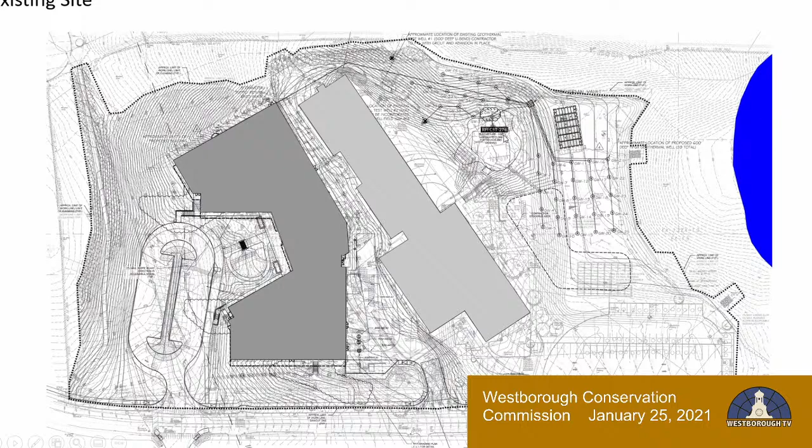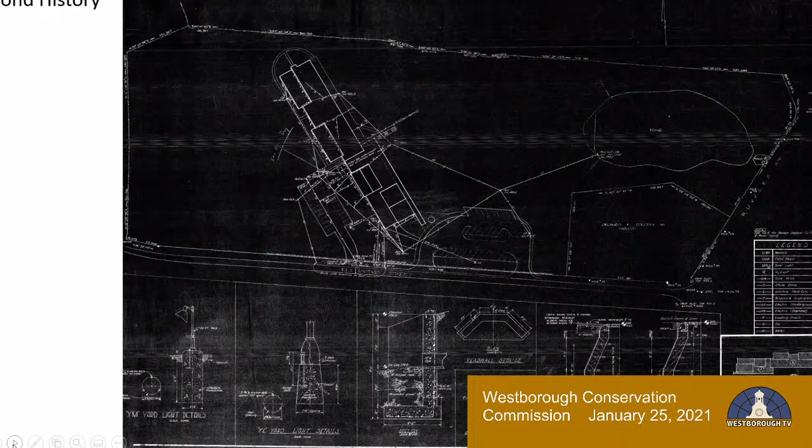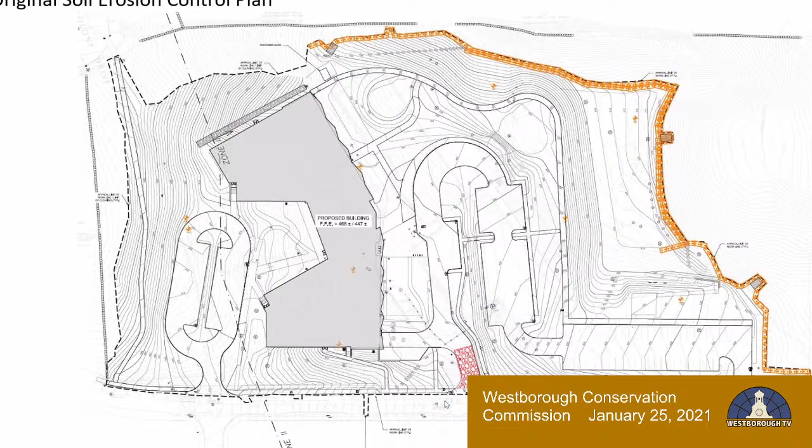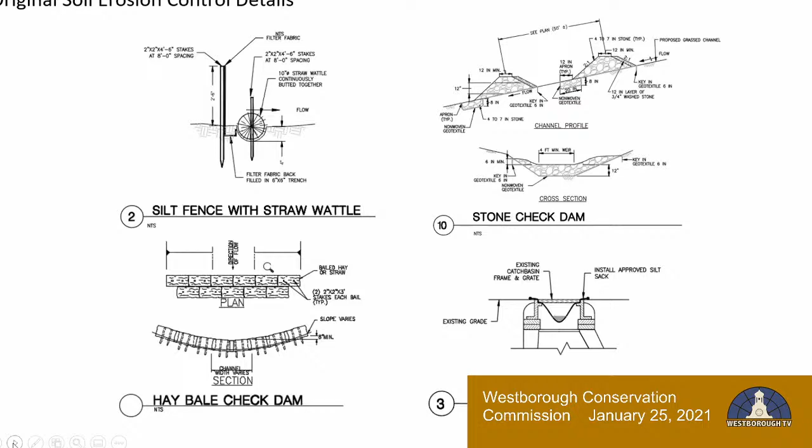And then if you go to the next sheet, Caitlin, it's trickier to see on the site plan, but some of the other erosion measures that were part, as you can see, the silt fence and the wattles, the check dams. We had both stone check dams and hay bale check dams in place, and all the catch basins have silt sacks on them to ensure that silt does not enter the drainage system itself.

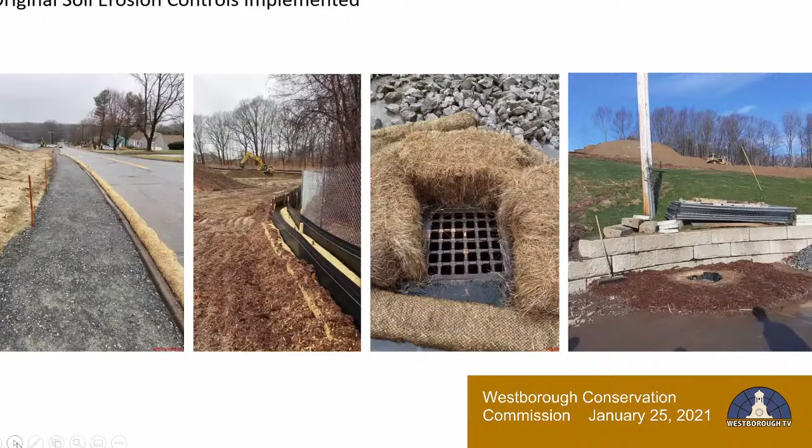Unfortunately, this has not been a typical site. So maybe Caitlin can go through the original issue of siltation that we ran into and some of the history.

Yep. So the first siltation issue we experienced happened around May of 2020 when we were excavating the uphill site, which is to the west, the footprint of the new Annie E. Fales. What was happening was any rain event we had, water was washing down the slope.

This is the high point of the slope, the low point of the slope. Sorry if I didn't previously state that. So any water running down the site, you can see in the image on the left-hand corner of your screen, was picking up this very fine glacial till silt and overwhelming the drainage controls that we had in place. So all of that very fine silt was getting into the existing drainage system, which is highlighted in red on the screen, and funneling through the drains to the head wall at the western portion of the pond.

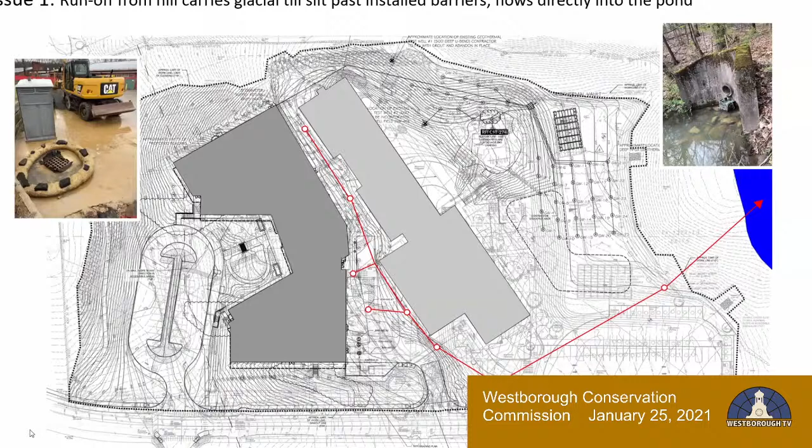Our initial resolutions were to enhance a lot of the controls that were on site, extra straw wattles, some check dams to slow down the water as it was running down the slope to give it more time to let that extremely fine silt filter out of the water before reaching any of the manholes.

We tried diverting the water again to slow it down and direct it away from the manholes. It was still overwhelming the system. The silt was just extremely fine and was finding its way into the drainage system.

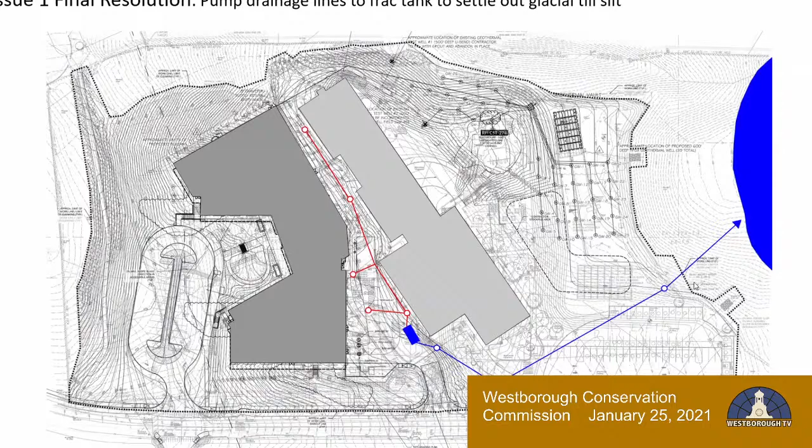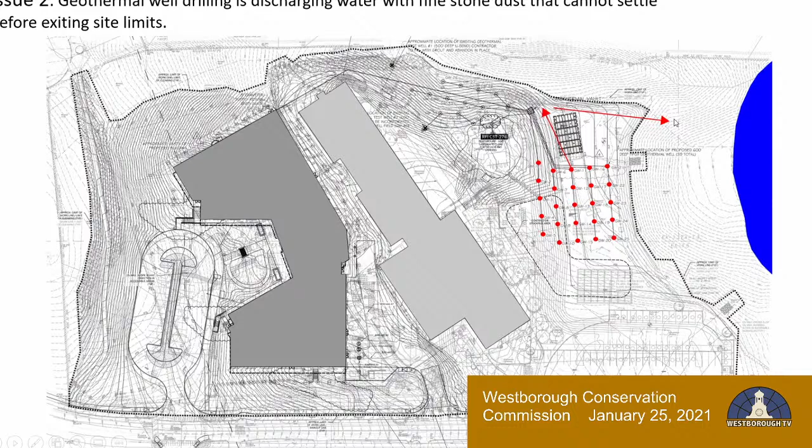The siltation issue number 2 that we ran into occurred December of 2020, while drilling for the geothermal wells, which are highlighted with these red dots that I'm circling. The water contained a very fine stone dust. So when the water from drilling the geothermal wells was pumped onto the site, it was too fine to filter out and was leaving the site in any of the drainage water.

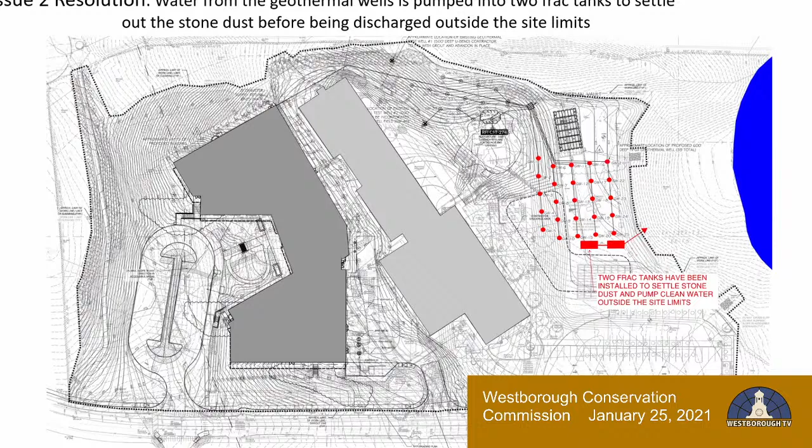So we again installed frac tanks, 2 frac tanks, to deal with this super fine stone dust we encountered while drilling the geothermal wells. Same principle as before: the water with stone dust is pumped into a compartment treated with a flocculant. The stone dust settles and the new clean water is then pumped off-site, directly outside of the site limits so as not to pick up any additional sedimentation. It's purely clean water that then can flow into the pond to the east.

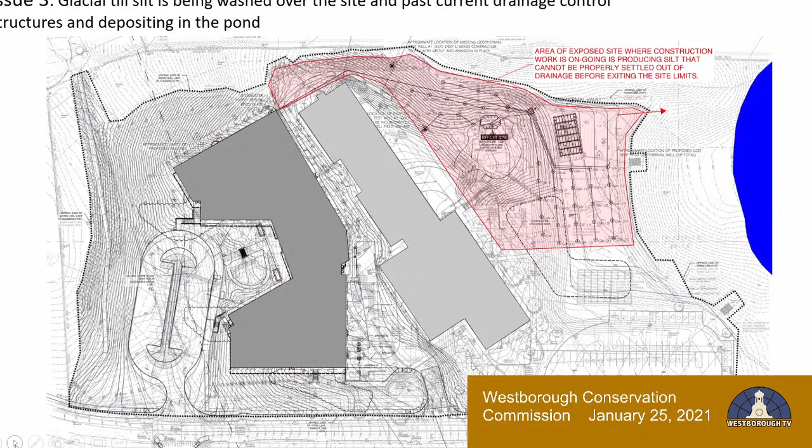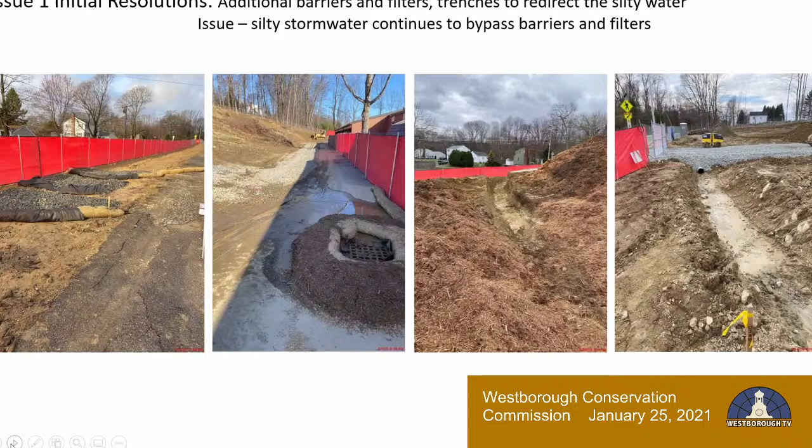Yeah, and there's no question, and Andy, we didn't get a chance to talk about it, but the private site up gradient on Eli Whitney is definitely contributing to the siltation. Okay. No question. And it could have been just along the gutter on Eli Whitney Street that did drain that site. I was at the tail end of the rain event, so I couldn't gather. There wasn't a huge flow through that gutter system and the catch basins. But I might have been catching the very end of the discharge of the event at that spot that we were talking about on Ruggles.

And by the time I worked my way up, maybe 20 minutes later to see that site, it had stopped raining, and I didn't see a lot. I saw definite signs of runoff coming from that site and a lot of exposed soil. So I knew, during the peak of the event, that site was contributing to it as well. Well, that's another issue we'll have to take offline. Yeah. But it's something I think that can be addressed as well.

Andy, if I can just make one comment, Fung Nguyen, who's one of our inspectors in the engineering department, and I met with the owners and construction team at 38 Eli Whitney this morning. That's the site immediately adjacent and to the west. And they did have some weak spots in their erosion control system as well. So they're implementing some additional measures, and we're going to be monitoring that site closely as well.

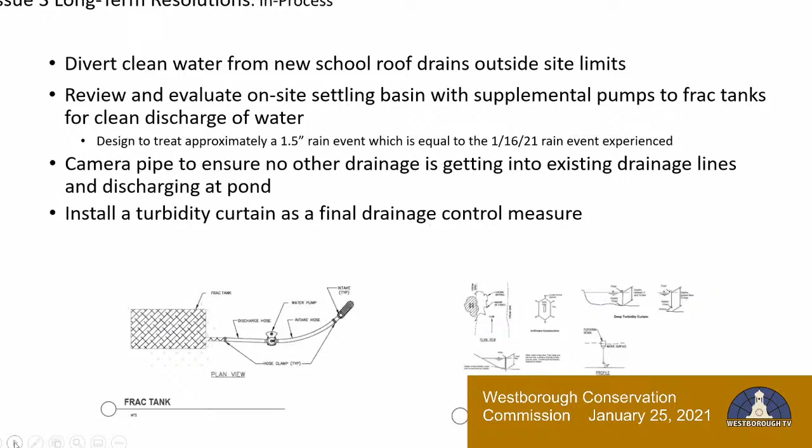Okay, it is true, and all you have to do is walk by and look, because the siltation leaves a trail off the site. So I just wanted to make sure that was said, that we are working with that site too, and it is true that there's an issue there as well. So you all beat me to our last slide, which opens it up for any questions or comments.

Yeah, I have a question relating to how the flow from the drilling operation is being handled. When we were there, our understanding was that the stuff coming out from the drilling was going into a frac tank, and that clean water was being discharged through a flexible pipe off-site downslope. It wasn't discharging at the time, but when we looked at that area off-slope after our site walk, we found a fair amount of evidence that there was silt in that flow coming out of that pipe as well, which was unexpected based on what we had understood. So can somebody explain that for me?

And I think you're absolutely accurate. And that was the discussions, and that's our intent. I believe that was one isolated incident where something had happened with the frac tank or the way that their operation was set up. Since then, we have that more on a regular rotation as far as checking to make sure, and the cleaning and the maintenance of the frac tanks maintained. Your observation is accurate, and everything was put in place, and I believe it was just an isolated incident that happened at that location.

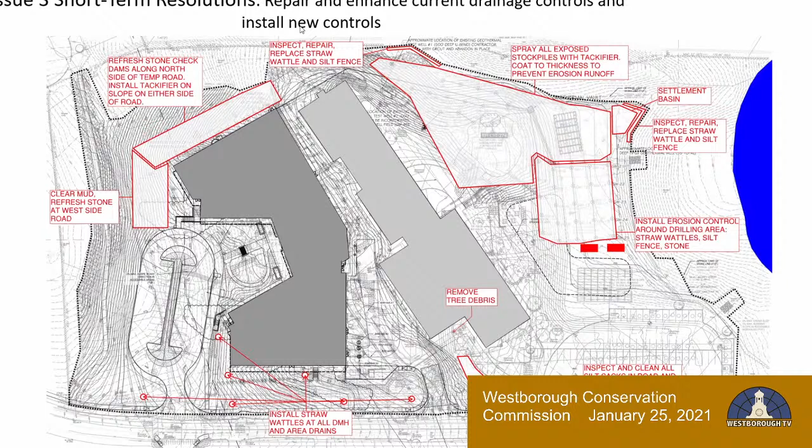Okay. I do have one other thing that's just sort of business for the board: there is yet another committee being formed. It's called the Land Prioritization Committee, as if the Open Space Committee wasn't enough. Mark Silverberg is representing the planning board, and he asked whether I'd be interested in representing the ConCom, since the ConCom needs a representative as well. Is anybody else interested in being a representative from the commission on this? I nominate the chair. Okay. Second.

Roll call. Andy Koenigsberg, yes. Tim Buckaloo? Yes. Jerry Cushing? Yes. Okay, who am I missing? Stephanie Kelly? Yes. Justin Lundberg? Yes. Gary Kessler? So I neither heard what this committee is doing nor what you're voting on. Could you tell me what those are? Well, Shelby probably can tell you better. They're looking at prioritization of land acquisition for the town. You want to unmute yourself, Shelby, and explain it a little better? Hi, everyone. Thank you, Andy. Yeah, it's looking at long-term prioritization of land acquisition.